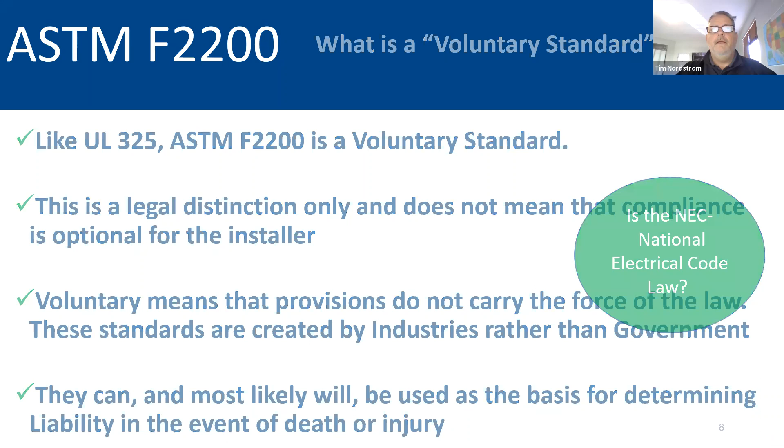Just like we say, is the National Electrical Code law? No, but it's what electricians go by. That's the standard. If the gate operator, which I hope the ones you're putting in are UL325 listed, then the entire installation needs to be in compliance with UL and ASTM. We got to do it to the best of our ability. Hopefully we're all using UL325 listed, tested machines.

There are some local codes that may require compliance with UL and ASTM. Is this going to be mostly verbiage? Yeah. Have I really heard of many, even few sites, where some inspector came out and said, hey, your photo beam's not at the right height, or the screening on your slide gate doesn't meet the 2 1/4 inches? No, because it doesn't matter, they're requiring compliance with it.

One thing I do see on a regular basis, just two days ago I was helping a customer out with a big spec, and it was very clearly written in bold letters: job site will comply with UL325 and ASTM F2200. So I see that more and more. Again, does it mean somebody's actually going to come out with a clipboard and hard hat and critique it? Probably not. Maybe that day will come someday. It's not really here today, but that does not mean it's voluntary. You are going to be held to it.

Question we get a lot: can I work on an automatic gate that doesn't meet the current standard? It's kind of a yes and no answer. It's yes if the gate and operator were installed prior to F2200, which came about in July 2002. We're getting further and further away from that, almost in July of 2021. But there are sites out there, no doubt, that are this old, and the answer is yes, you can still work on it.

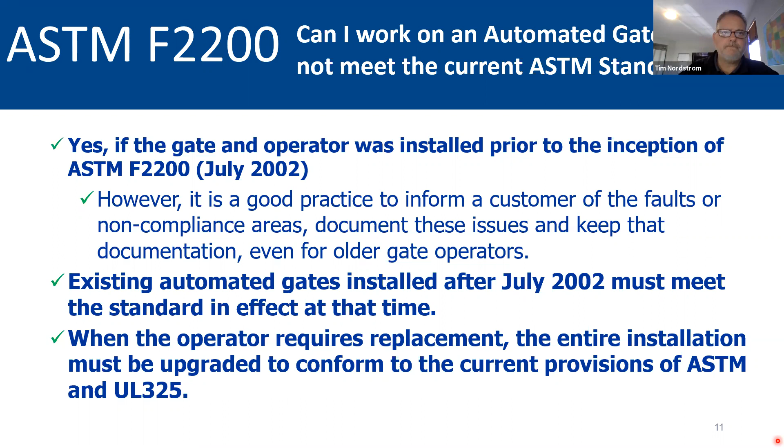Where can you find information about ASTM? I get that all the time—where can I find it? And the easy answer is it's free. It's right in every automatic gate operator manual. The first one to six pages of every manual is everything we're telling you here. They put that in—there's a reason it's at the beginning, because you open up the book, that's what you have to see. The manual is a fantastic source, and it's also going to be the document that the attorneys will bring to the table when there's an injury or death, asking why you did not install it per the manual.

DASMA.com—fantastic resource for you. Please use it. They've got a ton of simple, easy-to-read technical data sheets that target specific parts of F2200 that you can download, include in your proposal, send to end users. It helps explain why your job site is more detailed, possibly more expensive than the next guy. But this is a great educational website, DASMA.com, and of course ASTM.org. If you want to download the F2200 document, I think you can. I don't remember if F2200 has a cost—if it does, I think it's nominal. Yeah, you can download it—I think I just bought one, around $50. It's copyrighted, so when you buy it, you'll download it and it'll have your name on it.

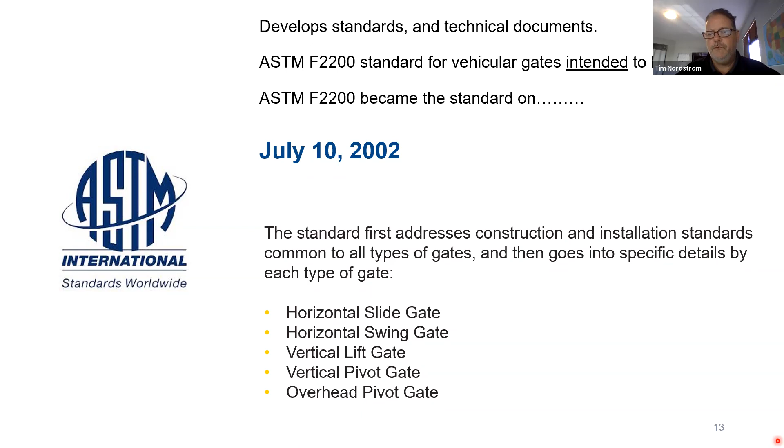The first part of F2200 covers the general requirements for any automatic gate. It doesn't matter slide, swing, vertical lift, vertical pivot - it does not matter what type of gate. Everything we're going to cover right now applies to any and all automatic gates.

Number one, gates cannot fall over. If they do somehow fall over, they must be prevented from falling over more than 45 degrees. And yes, that includes swing gates - we'll talk a little bit more about this when we get to the swing gate section. But a gate, when it's detached from its supporting hardware - swing gate hardware is hinges, slide gate maybe cantilever rollers, V-track rollers, what have you - we can't have gates falling over. Believe it or not, people get injured, sometimes killed, by gates that fall over on top of them. Very bad. Again, all gates have to be prevented, and we'll get into the specifics on those.

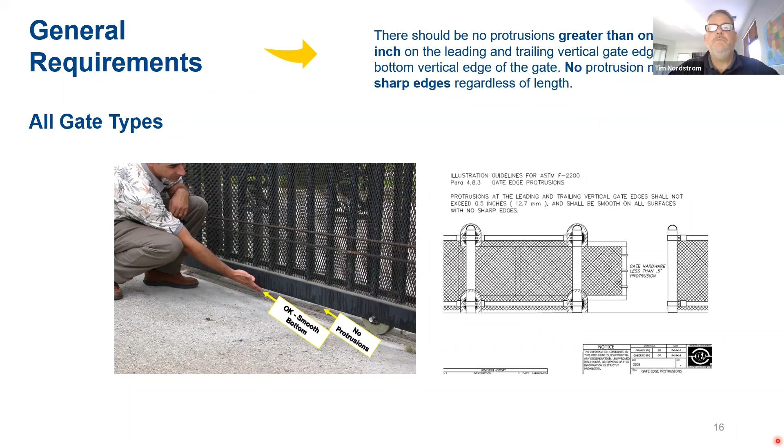Another thing for all gates: we cannot have any protrusions on the leading and trailing edge or the bottom of the gate greater than 1/2 of an inch, and they must be smoothed over. So no protrusions on the leading edge of the gate or the bottom.

We've got some pictures coming up next of some examples of those protrusions, some of the common things that are done in the industry that actually violate ASTM.

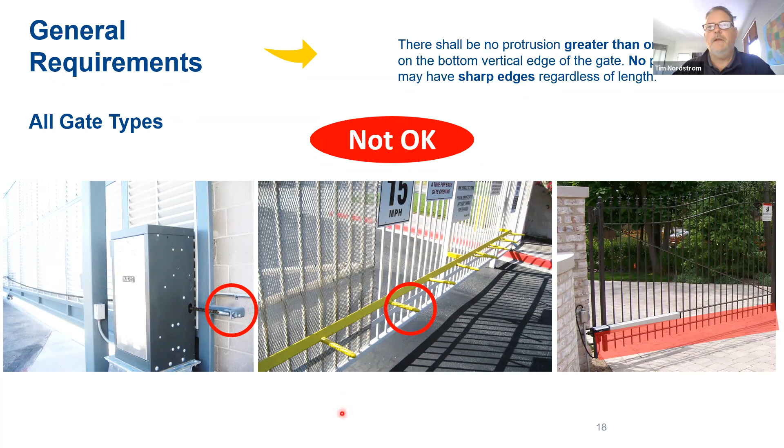Now, that doesn't mean that we can't have protrusions. ASTM F2200 is very clear that we can still have protrusions out the top of the gate: decorative spear points, finials, whatever it is you want to put. Those are allowed. Those have been shown to not cause nearly the injuries that the other protrusions off the leading, trailing, and bottom edges of the gates have shown.

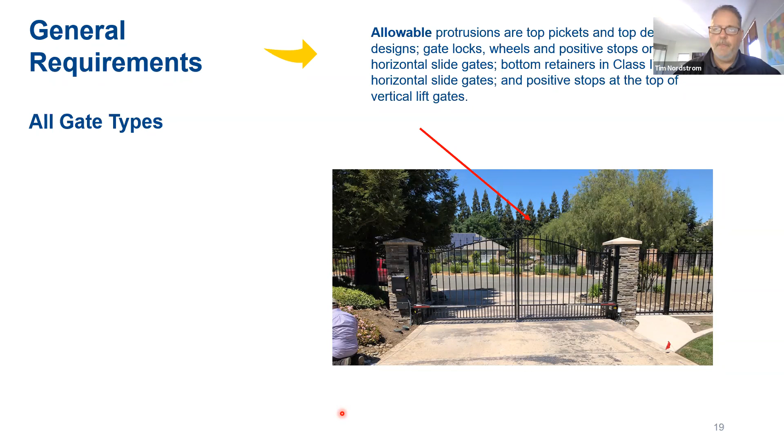So you still have complete control over what you put out the top of your gate. As soon as I say that, if we're going to talk about barbed wire and barbed tape, there are some restrictions. Obviously you're not going to see barbed wire and barbed tape too much on residential jobs, but certainly on commercial jobs. Barbed wire can't be installed less than 6 feet from grade.

So I'll go out there on an extreme. You're having an automatic slide gate, swing gate, doesn't matter. Again, this is all gates put in, and it's only going to be 4 feet tall, 4 feet off of grade. You cannot put barbed wire on that gate unless you raise it so that it is 6 feet from grade. Same with barbed tape, razor ribbon, what have you, but it has to be 6 feet from grade.

Got a good and a bad illustration, or a photo. 8 feet, right Tim? 8 feet, right? Did I say 6 on barbed wire and 8 on barbed tape?

If this gate over here on the left side - God hope you don't automate that gate, but if you do - this barbed tape up here, if it's less than 8 feet off grade, it's got to come off, or you've got to raise the gate or what have you. This right picture here is perfect: cantilever slide gate, barbed wire greater than 6 feet from grade, perfectly allowed.

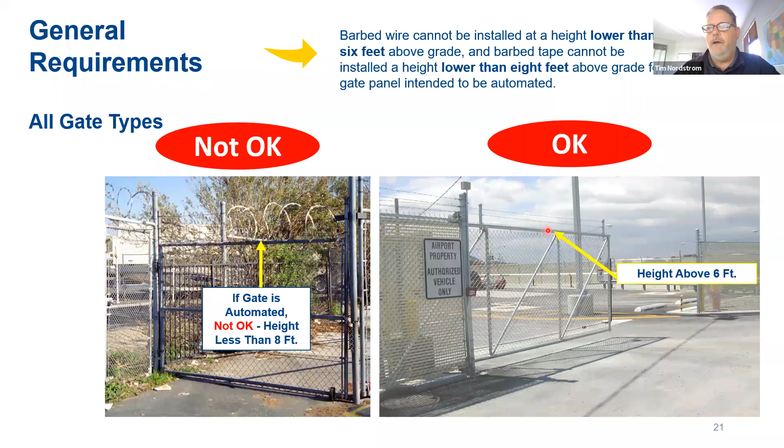Read into that what you want to read into it. But if there wasn't a gate operator there, would this gate move on its own? If it does, that needs to be addressed before it can be in compliance with F2200.

Any questions on that one? I know that we have a tremendous customer base that lives in areas where gates are installed where they may move on their own.

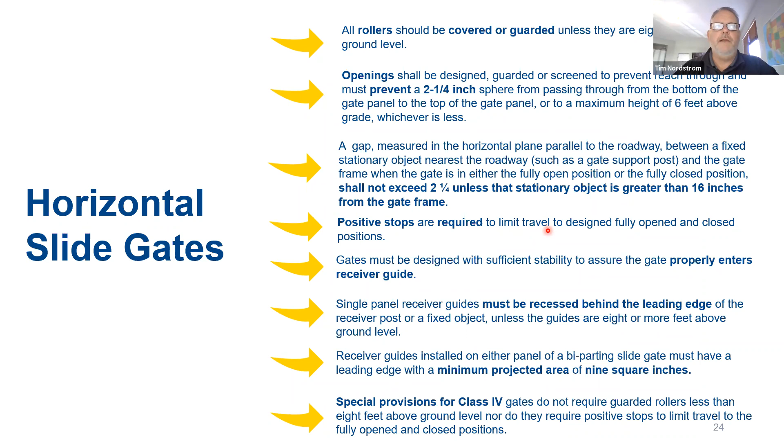Okay, we're going to move on. Now we're going to shift. Everything we're talking about right now is specifically addressing slide gates. We'll go over every one of these points here.

Rollers must be guarded. Any exposed rollers less than 8 feet from grade have to be covered. So if you're using cantilever rollers and they're less than 8 feet, all 4 of those wheels have to be guarded. There's plenty of commercially made, good quality roller covers out there.

I live in an area where we don't do a lot of cantilever gates, so I don't have tremendous experience with them. I know there's some negativity on roller covers out there, blah blah blah blah blah. I've also heard plenty of dealers say no, they work pretty well. Like Zach said, F2200 doesn't care - if you've got an exposed roller less than 8 feet, it has to be covered.

When we get to UL, we're going to talk about the classes, class 1, 2, 3, and 4. Class 4 being the least amount of operator installations out there, but there are some exceptions to all the rules when we talk about class 4. But for today's class, for everyday installations, rollers are going to be covered.

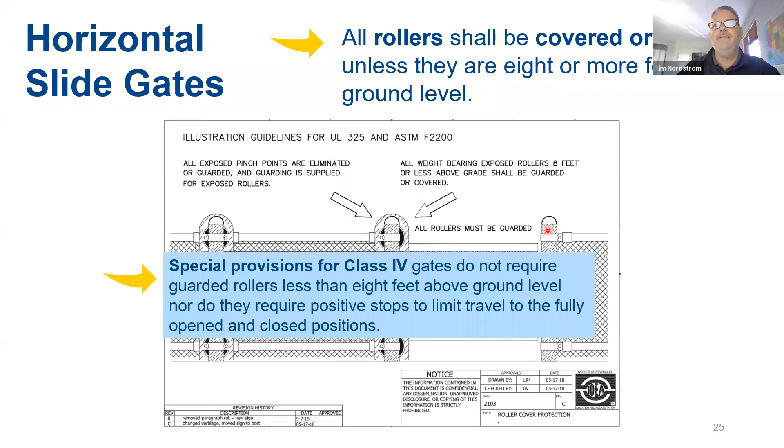That also applies to any V-track gates - V-track wheels, guide rollers, all have to be covered. There's plenty of commercially available guide rollers that come already covered, ready to go. There's many different manufacturers of them - check them out. You can always build your own if you want, but in this case I don't know why you'd do that. They're readily available.

Wheel boxes, however you want to do it, just the wheel has to be covered. And of course, here's cantilever with all 4 wheels. We don't see the 4th one, but they're guarded as they should be.

Picket spacing. All automatic slide gates must be designed so that a sphere greater than 2¼ inches cannot pass through the gate or the fence panel that it slides along, from grade up to 6 feet.

When this first came out in 2000, man, did I hear a lot of hooting and hollering and blah blah blah. I see so much compliance with this now. People have said, yes, this is right. This has greatly reduced our injuries and deaths, just this, especially when we couple it with some of the other provisions of UL and ASTM.

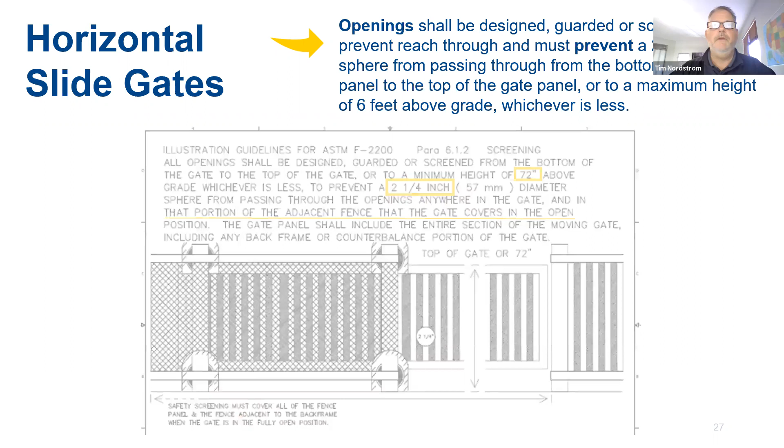But simple fact is, the gate has to be built and designed so that a 2¼ inch sphere can't pass through, from grade to 6 feet, the entire gate and the fence that it slides against.

Now, one thing that gets thrown out all the time that I don't like is, well, I have to put mesh on the gate. No, the word mesh, I'm not even sure is even mentioned in the F2200 document. You do not have to put mesh on any gate. Mesh is just one of the ways you can have your gate comply with F2200. It's certainly an acceptable way, but it's not the only way.

You can weld your pickets closer together, what have you. But you do not have to put mesh. I've heard people say that, and I just want to make sure everyone understands that. You just have to comply with the 2¼ inch.

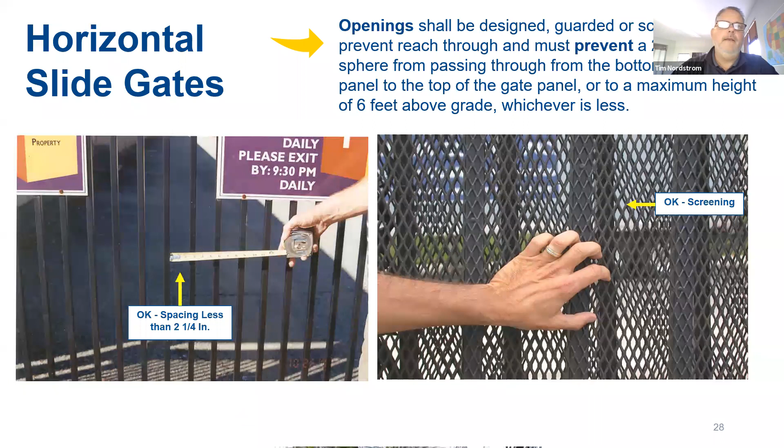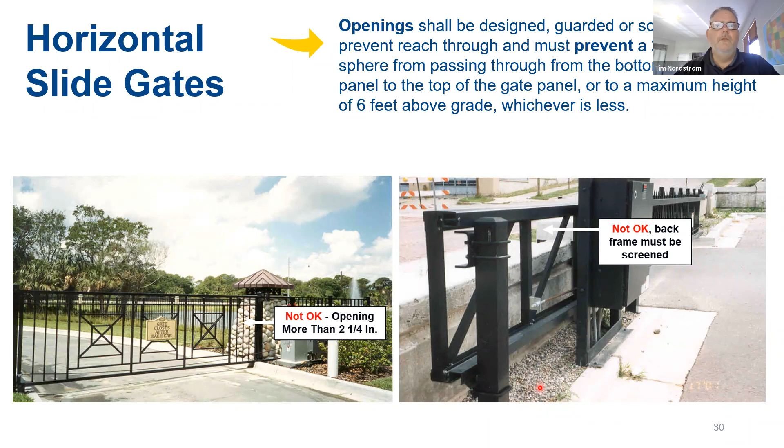I see a lot of similarities with numbers in UL and ASTM, which I really appreciate. They try not to throw too many different numbers at us. One that they say, and we're really going to focus on this in the UL section coming up, is this gap between the gate and some fixed stationary objects, which is traditionally a gate post. If that gap between the gate and that fixed object is greater than 2¼ inches, it must be reduced to 2¼ inches or less.

Maybe that's welding in an ornamental iron picket or two, whatever it may be, but this gap can't be greater than 2¼ inches. Likewise, if I'm using this pole over here for fall-over protection, if it's within 16 inches of the gate, it's an entrapment and I'd have to protect it. The better way is to move it greater than 16 inches away, and per F2200, it's no longer an entrapment. So between 2¼ and 16 inches, I've got to fill. If I'm less than or greater than, we're okay. I won't beat this up too bad.

This is the front view, looking at the gate, the slide gate coming at us. We call this the draw-in post. This is the number one spot where deaths and serious injuries occur, and we'll beat this up in about an hour or less. Just so you know, we'll really beat that up. That draw-in post is where we seriously harm people.

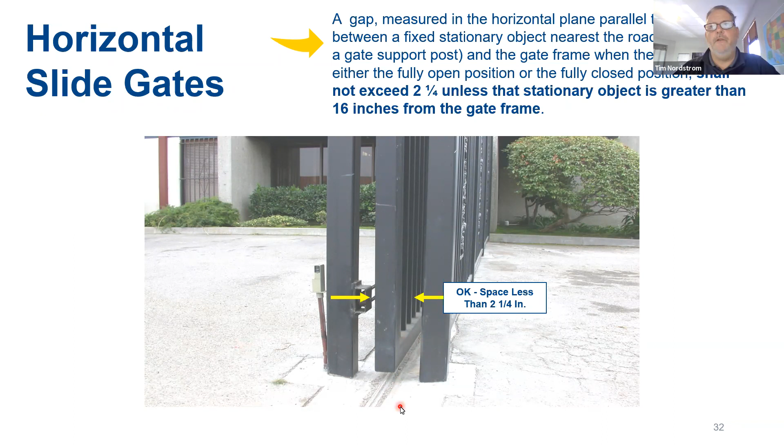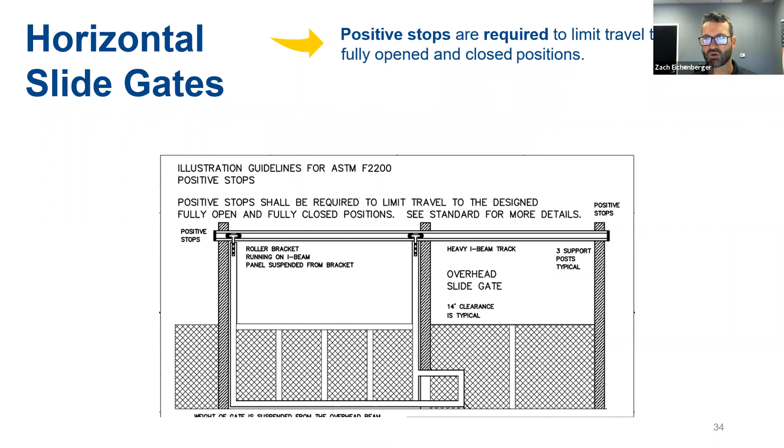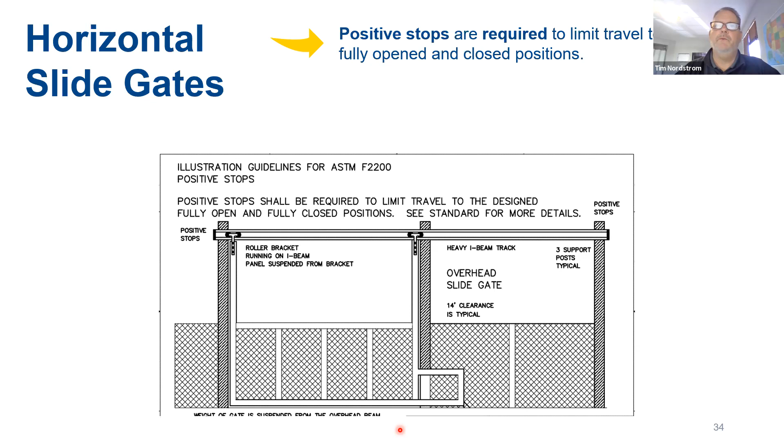Positive stops. I can't stress this enough, nor can F2200. Positive stops must be installed, however you do it, so that the gate cannot over-travel. Can't have a gate falling over due to over travel because we didn't put stops. Again, they don't have any recommendation on how to design the stops. I've seen them done countless ways, and every way that prevents the gate from over-traveling is the right way, as long as we don't create a separate problem, which we're going to get to, which is having something protruding into the lane. Positive stops, both open and close, are required on slide gates.

Receiver guides. This is something that's used quite extensively on automatic slide gates. You might call it a retainer, receiver guide, yoke, whatever. I'm going to call it a receiver guide because that's what F2200 does. A receiver guide cannot project into the gate opening unless it's greater than 8 feet off the ground. If it's less than 8 feet off the ground, it must be recessed behind the post or fixed object, and the gate can then slide into that. We cannot have that out in the opening. Many, many people have been harmed because of that, and I've got some pictures here. So it's really clear: it's got to be behind if it's less than 8 feet.

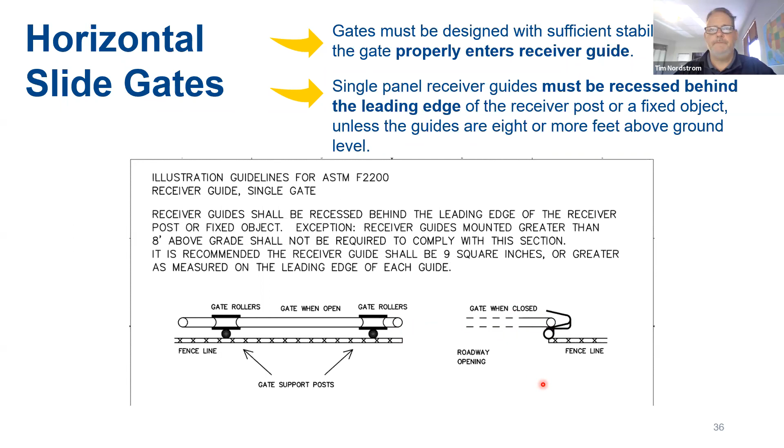Three pictures here. This one over here, I've seen gates like this. This is a disaster waiting to happen. We're ready to impale somebody on either side of this gate. I've shown this in the past and people say, yeah, well, it's their own fault if they fall into that. No, that's not the case anymore. People can be distracted, they have no clue about this automatic gate, they're looking at their phone, the dog runs at them, whatever. Before they know it, that gate forces them right into that. We have a serious injury.

Over here is a very common installation. It slides into a gate receiver here, but it's projected into the driveway opening. We've got to recess it behind that post if it's less than 8 feet off of grade—all done in the design phase. I have a contemporary of mine who works out of the Memphis, Tennessee area, and he says 90% of gate entrapments can be eliminated in the design phase. And I agree with him. In the design phase.

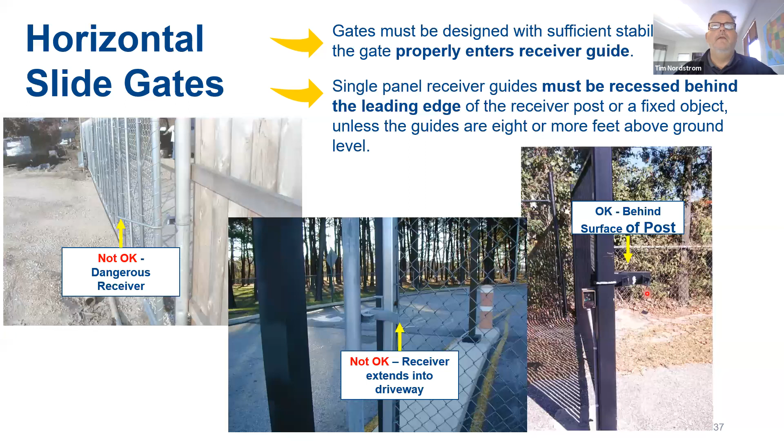If you have a dual, biparting, or primary/secondary slide gate where two gates come together and meet in the middle, and one of the gate panels wants to have a gate receiver on it, that's fine. But if it's installed less than 8 feet up, it has to be designed so the leading edges measure out to 9 square inches. Basically what they want is a hunk of metal or material that's easily identified, with less chance of impaling somebody. So with a biparting gate with a receiver guide on one leaf, that's 9 square inches on the leading edge, or mount it 8 feet or taller off grade.

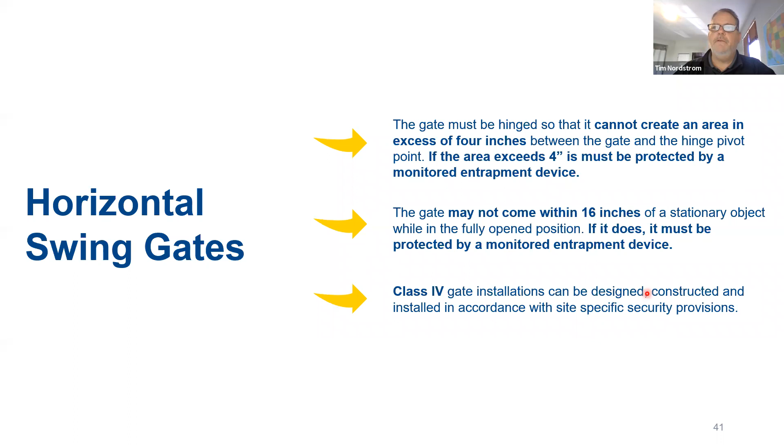Okay, let's move on to swing gates. Swing gates by their nature are safer than slide gates. It doesn't mean people don't get hurt on them - trust me, they do. But by their nature they are safer, and they don't have quite the restrictions that a slide gate does. They have a couple of things they're very adamant about, and that's what we're going to cover here.

This is one of those design phase things where you could eliminate an entrapment. What F2200 says is that if you have 4 inches or greater from the center of your hinge to the edge of your post, column, or whatever, you have created an entrapment. They're not saying you can't do it, but if it's greater than 4 inches from here to here, a person can become entrapped right here, and you would have to protect that. How do I protect it? Maybe it's a gate edge, maybe it's a photo beam - we'll learn about those in UL. The fact of the matter is there's an entrapment that needs to be addressed.

In the design phase, we can build whatever column we want - build this beautiful 6-foot rock column, imported stone from Italy, I don't care. But if we can move that gate post or the gate attachment to the rear of the column to less than 4 inches, we have no entrapment. We've solved a problem that didn't need to be there. So we can hang our gates in the center - F2200 does not say you can't hang your gates in the center, and they're not saying you have to move it to the end. What they're saying is if you have 4 inches or more, you have an entrapment that has to be protected.

The second part of swing gates is if, in the open position, that swing gate comes within 16 inches of a fixed object. A fixed object can be a wall, a fence line, whatever. If that gate in the open position comes within 16 inches of that fixed object, that is considered an entrapment area.

We have to protect it. Most commonly, the way we protect it is we shoot a photo beam the entire length of the gate. That way, if somebody is standing there and the gate's given an open command, it won't do anything. Or as the gate is opening and somebody gets back there and breaks that beam, the gate will respond and hopefully not hit them, reversing back the other way.

So 4 inches, 16 inches - those are the magic numbers on swing gates. I feel like this verbiage just never really got updated as life went on. For some reason they call out this 'open position,' but really it's from any position.

If that gate's closing or opening within 16 inches, you have an entrapment zone. We don't see the whole gate, but let's say this is the gate here and there's a post right here that it closes up against - that's an entrapment. Absolutely.

I think probably what the authors of this did was say, well, that one's evident, right? Everyone knows that. This one over here, they had to pick a number, but 100% right.

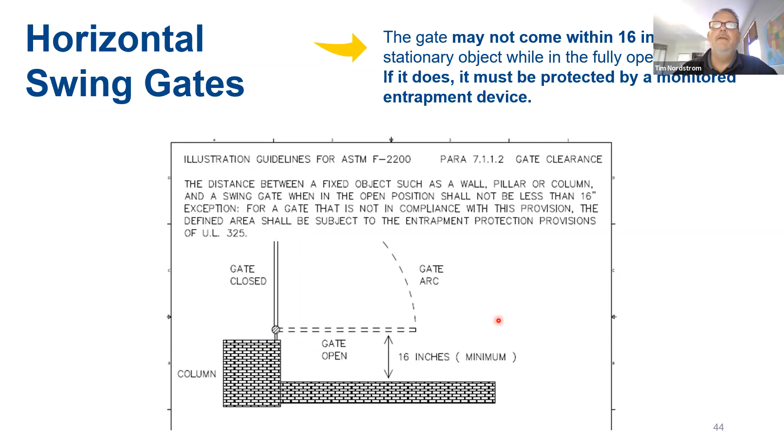Here's just an illustration. The reason we chose these photos - we don't want to say you cannot open a gate or close a gate up against an object less than 16 inches. Of course you can, that's going to happen. You just have to protect it.

In this case, they've mounted a photo beam. If somebody was to break that beam, that gate would respond, hopefully before somebody got hurt. So we can do these. In this job site here, I doubt they had any room - there's no design phase here that they could have done. This one had to happen this way.

Other job sites, we might be able to design so that we exceed 16 inches and we don't have that entrapment.

This is another one of my favorites that I'm sure everybody on this panel does religiously. Swing gates fall under fall-over protection. I'm joking somewhat, it's not meant to joke, but some things you have to look at and say, okay, how many people are meeting this one? And I would say very, very few.

F2200 says if the gate's detached from its supporting hardware - in most cases the hinge - the gate can't fall over. Again, F2200 does not say this is how you prevent that, these are just illustrations of ways to do it. I don't see this happen too often, probably violated more times than not, but just pointing out, F2200 says yep, got to address that.

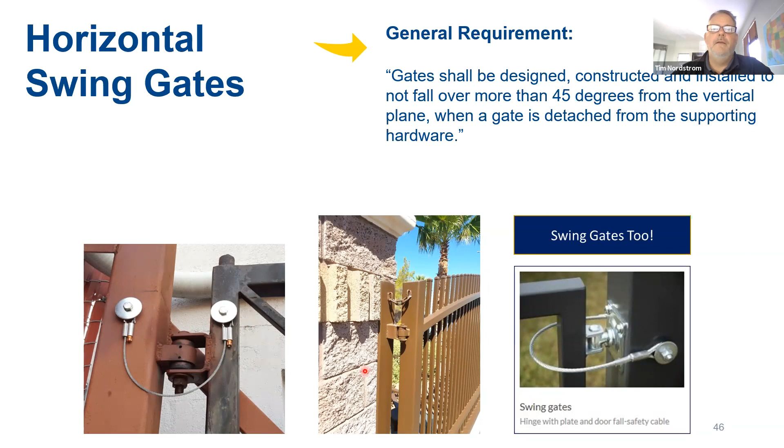One of the nice things about F2200 is there is no picket spacing required, no reach-through requirements on a swing gate. Due to the nature of how they work - swinging either towards you or away from you - there's no shearing action like a slide gate, where if you're reaching through and the gate goes open, it's going to pull you in. If you were reaching through this gate here and the gate started moving, you can move with it, so you are free.

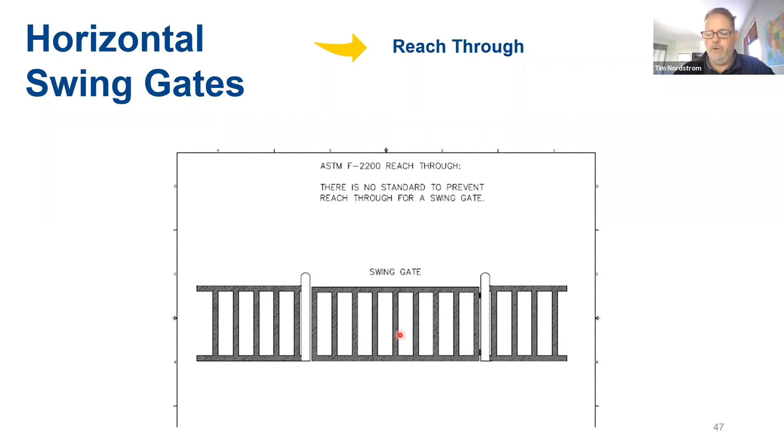In class 4, we'll talk more about that - you can do a lot more flexibility. But you are free on a swing gate to orientate your pickets, or lack of pickets, in any way you want. Again, you still can't have protrusions, things like that. But if I want pickets 24 inches on center, 36 on center, whatever design I want, that's perfectly allowed on a swing gate - not allowed on a slide gate, but certainly allowed on a swing gate. I can have varying degrees, like I have here, with pickets that are closer, which open up here.

This would not be allowed on a slide gate, certainly allowed on the swing.

Tim, if I could point something out, the group's probably picking up on this, but there's really 3 measurements you've talked about so far: 2 1/4, 4 inches, and 16 inches. There's another one in UL, and that's 6 feet. But they did a pretty good job staying consistent here. That 2 1/4 measurement comes into play when there's shearing action. If there's shearing action, we want to bring those reach-through areas down even further, because that represents an opportunity for injury or death in a bigger way. And 4 inches is more, maybe this way, not really shearing, but still a possible entrapment area. So just remember those 3 measurements: 2 1/4, 4 inches, and 16 inches.

This is the vertical pivot gate. For those who do them, you know what they are. For those who've never seen one, it's basically a gate that pivots like your elbow. Starts with the gate in the closed position, has a central pivot point, and pivots straight up to the sky.

The one difference between a vertical pivot and a slide: the similarity is I have to make sure I don't have an opening greater than 2 1/4 inches from grade to 6 feet up, anywhere this gate passes by a fixed object. Most installations, what you'll have is the gate, and some type of fencing material that is in parallel with the gate operator.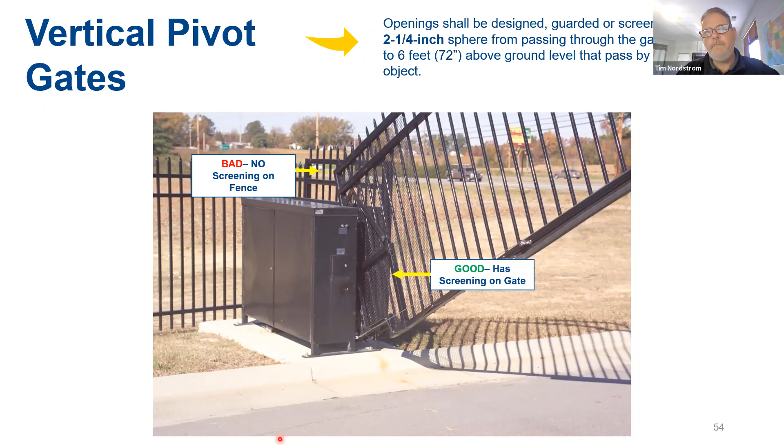As compared to this job site here, where there is zero - neither the gate nor the fence panel has any type of less than 2 1/4 inch spacing. That's an accident waiting to happen. I don't know this job site, but I can only imagine.

Again, I always think of kids. I get a group of high school kids walking by here, or elementary school kids, and somebody sticks their arm through - that can easily cause death. Someone can get seriously hurt there. And it doesn't take much to greatly minimize the chance of injury.

Just screen it, however you want to screen it, 2 1/4 inches. This portion of the gate all the way out here that doesn't pass by the fence panel doesn't have to be screened. You can have your pickets, whatever you want there, but 2 1/4 here.

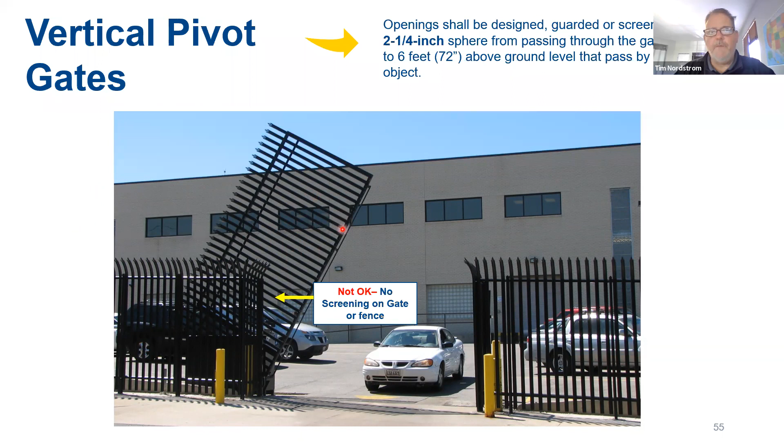In addition, just like all other gates, no protrusions - can't have any protrusions off the bottom of the gate. You can only imagine if the pickets or something like that came off the bottom of the gate and hit somebody, what kind of potential damage that could do. All the framing members, everything's got to be smooth, no protrusions out the leading edge, anything that comes over. If we're going to enter into a receiver guide, it's got to be designed so it goes into that receiver guide properly - it's stable.

Pretty similar to a slide gate, not exactly, but very similar. Certainly the same type of entrapments exist in a vertical pivot that do in a slide gate.

As we mentioned, there are some other gate types out there. There's vertical lift, which, if you ever get to work with one of those, that's awesome. Those are kind of once or twice in a lifetime type gates. We certainly have what we call overhead pivots, jam track, California gates. Those are the one-piece steel gates that lift up, generally for underground parking, because I come from the San Francisco Bay Area where parking is at a premium. They do a tremendous amount of underground parking, and there's no room to put in a slide or swing gate, so they do an overhead pivot gate.

Those have their own unique ASTM requirements. If you ever have a job site and you're unclear, reach out to Zach or I. We'll be happy to talk about it.

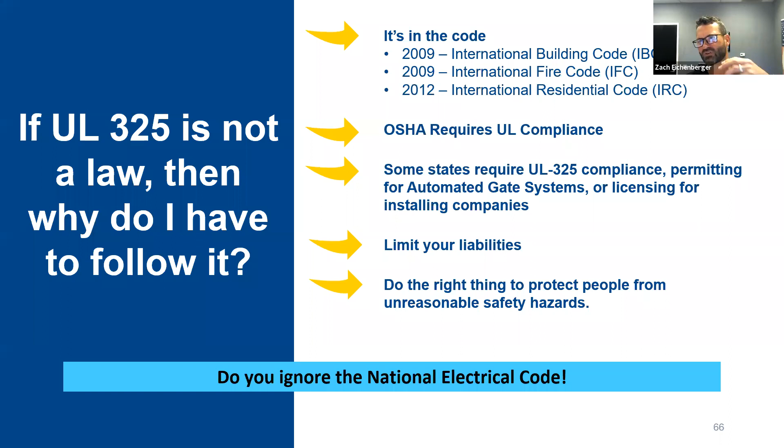We mentioned the National Electrical Code just as a frame of reference, just to get your mind in the right place. Okay, how do you comply as an installer? Again, from a UL perspective, I'd say everything you need to know should be in that manual. They're required by UL to put safety information in the manual. UL even inspects for that - they read those manuals and make sure that they're written to the UL requirement. Again, you can buy the UL document, but for the most part, everything you need to know about UL should be in there. It is mandatory, and failure to comply puts us in a bad position.

That's probably one of the first questions they're going to ask. Okay, all right, what about old installations? We talked about this in ASTM. Can I work on an operator that doesn't meet the UL standards, or doesn't have all the entrapment devices? It follows the vintage of the operator - that's really where you need to get your head right. If it was prior to 2000, well, the standard didn't really say you had to have entrapment protection.

Can you work on it? Yeah, you can work on it, repair it, do whatever you want to it. Technically, you're not in violation. Is it a good idea? Probably not, right? We're now 21 years into this. If it's prior to 2000, it's time to replace that operator, it's time to bring that gate up to ASTM standards.

So what happens if a customer asks you to bypass all these entrapment and safety devices? Look, it's not an option, for the gate operator, installer, or designer. What if they're willing to sign a waiver? They are of no practical use.

And for these reasons: the customer really doesn't understand what's at stake, they don't understand what the liabilities are. And you are the expert, you know what the liabilities are. Courts are going to say, hey, you knew better. In fact, it might be an admission of guilt. You're basically drafting a document that says, I know I'm doing the wrong thing here, but sign off on it. And you can't sign off somebody else's safety. Most likely the person that gets hurt on that gate didn't sign that waiver, so you can't sign away their rights. So again, waivers have no practical use.

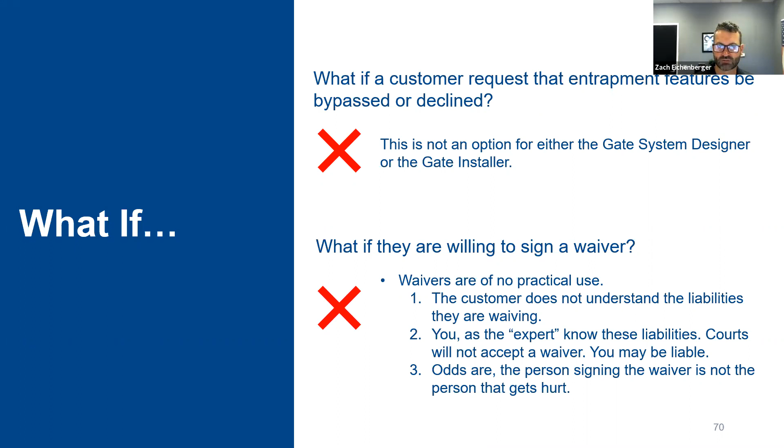And then when you move to class 3, we're no longer servicing the general public. So that'd be more of an industrial site or commercial site where the folks using the gate are trained on how to use it. So that's the big delineator, servicing the general public or not.

At that point, some of the standards, very few, I'll say very few, really one in particular I have in mind, ease up just a little bit. The main one is the speed of a slide gate. On a class 2, we can only go 1 foot per second. On a class 3, we can go faster.

And then there's your class 4, and that's restricted access, where it's going to be guarded and monitored, a high security type application. Important here is that the AHJ, or authority having jurisdiction, kind of signs off that, hey, I don't want these safety devices, I'm going to build my gate in a certain way. You can imagine at a jail, they probably don't want a bunch of photo beams and edges everywhere where it could be bypassed. So you're definitely going to run into those applications where you're a class 4, but just make sure it really is a class 4.

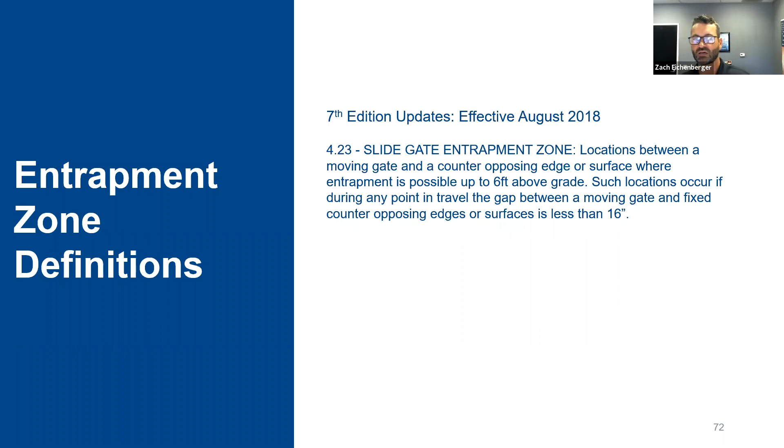I'm going to speak to these entrapment zone definitions because it's going to help you understand some of the other requirements that fall in line for UL325. So verbatim, a slide gate entrapment zone is locations between a moving gate and a counteropposing edge or surface where entrapment is possible up to 6 feet above grade. Such locations occur if during any point in travel, the gap between the moving gate and fixed counteropposing edges or surfaces is less than 16 inches. So a slide gate, sliding past anything within 16 inches, any fixed counterposing edge, is going to be an entrapment zone.

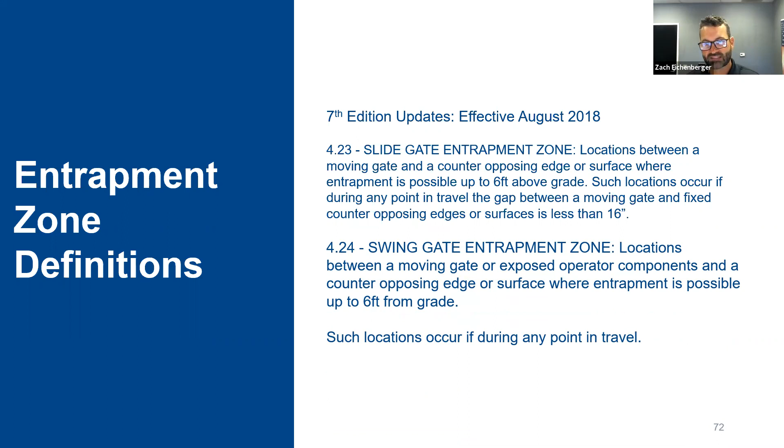Similar to a swing gate, it's more or less the same verbiage. If that swing gate swings within 16 inches of any fixed counterposing edges, that's an entrapment zone as well.

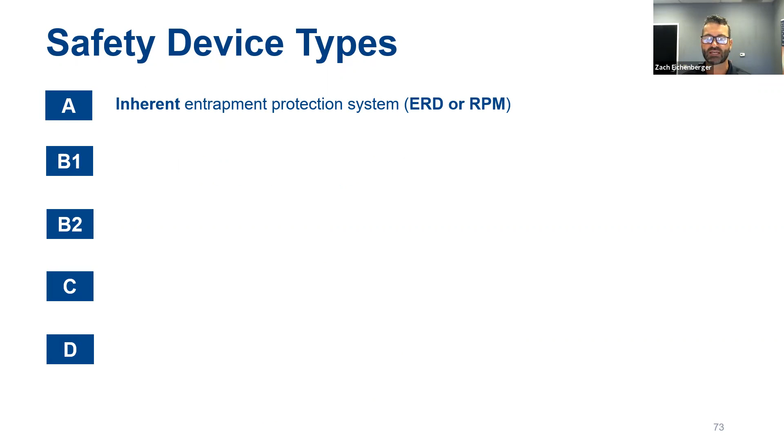A B1 is a non-contact sensor, like a photo beam. They're looking at other technologies to be added in there, but for the most part, a non-contact would be a photo beam. A B2 would be like a contact sensor, like an edge sensor, where you actually have to physically contact it. C is a clutch or pressure relief device, like you might find in hydraulics, or a clutch in an electromechanical. And yeah, important to note that those are swing or barrier only.

And then D is basically constant pressure. It's an actuating device. So if I'm holding that button down and the gate's moving, open or close, I'm holding another button down for open or close, I'm inside of that gate. That is technically an acceptable form of safety. Basically it's saying I'm looking at the gate, I'm holding the button, and if I let go of that button, the gate stops if someone were to come into risk of contact with the gate. So A, B1, B2, C, and D, just the different types of safeties that are addressed.

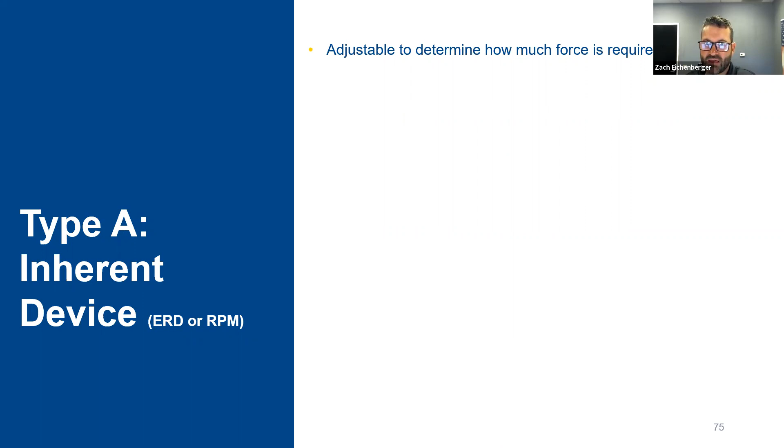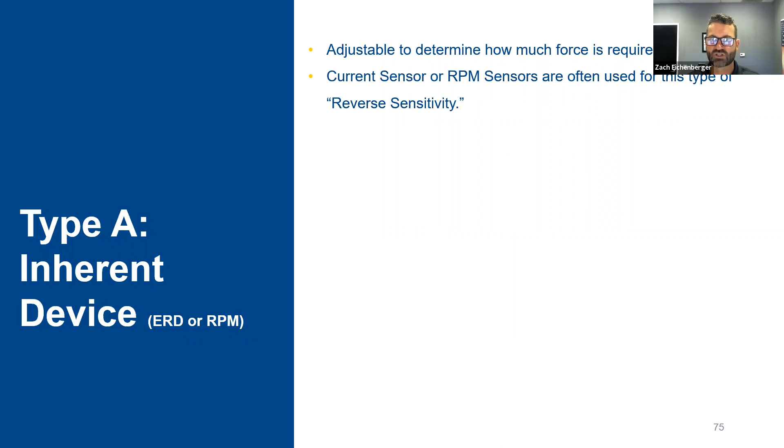Okay, so to break these down a little bit further, a type A inherent device, it just determines how much force the operator can put on that gate before it's going to reverse. Again, current sensors, RPM sensors, often referred to as reverse sensitivity. It's really that type of sensor - the operator manufacturer chooses what type of sensor they're going to utilize. And here's the key point: it's not preset. It must be adjusted by the installer, and it must be adjusted every time you visit the site. Why?

Well, hardware breaks in or it starts wearing out, and it might need more sensitivity, or you might replace some hardware. Now you got to back it down and have a little bit less sensitivity or more sensitivity. So you need to make sure that it's safe every time you go to that site, every time you leave that site. Inherent safety.

B1, okay, this is kind of a way to remember - that's your first decision, a photo beam or infrared beam. We've got to determine the location. We're given a little bit of guidance on that. We'll show you what that is. But ultimately, with all of these safety devices outside of an inherent, it's up to the installer, the designer, to decide where those are going to go. Because the manufacturer doesn't know everything about your site. They can't tell you exactly where to place those devices.

And in the manual, it will tell you what products have been tested with that operator. It will say, hey, I want this specific manufacturer, maybe even the specific model number. It should say that in the manual. Now, you go back prior to 2018, it might not, or prior to 2016, it might not. It was always kind of in the standard, but for some reason it got missed for a long time. It wasn't being inspected to. But today, every manufacturer must list the compatible safety devices in their manual.

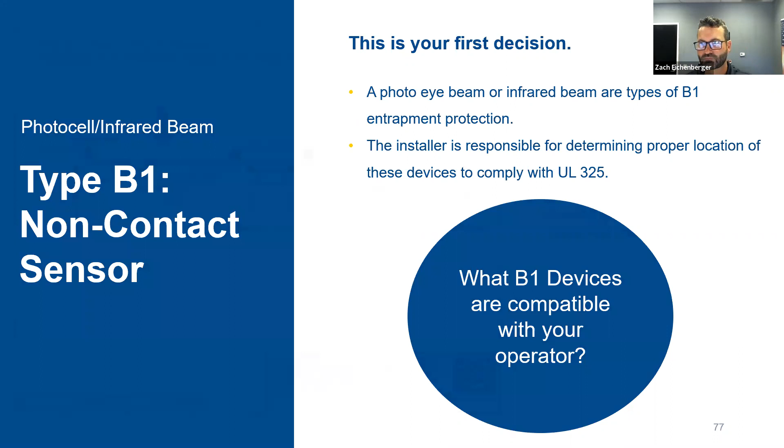Right, real quick. What if I'm using brand A gate operator manufacturer, and I really like XYZ photo beam. That's just my go-to photo beam. It works for me, and it works on this operator, but it's not listed as acceptable in the manual. Great question. So it works just fine, you wouldn't know any different. At the end of the day, you're just not following the letter of the law. Now if there was an accident, and something did fail with that photo beam, you'd be in a position of liability. The manufacturer's trying to protect their interests as well. They want to make sure the products used with their operators are quality, tested, and will withstand the test of time.

One small rabbit hole: if you're using a B1 photo beam for pedestrian protection, you have to follow the manual. However, if you have your entrapments for people covered and you decide you really like that XYZ photo beam that's not listed in the manual, but you're using it just to pick up or detect cars, that's perfectly acceptable. Yeah, no, that's a good point.

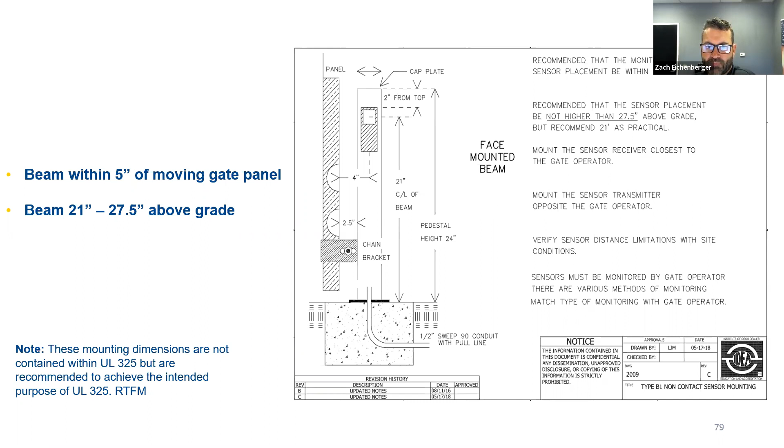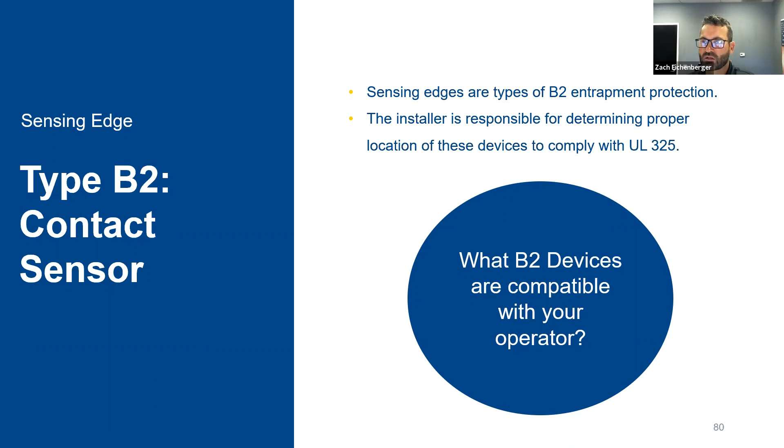Okay, B2, that's your contact sensor. That's where I'm going to come into contact with that sensor, like an edge, and it's going to stop and reverse. Again, you've got to determine what products are compatible with your operator, and you need to determine where to locate those edges.

Tim mentioned the draw-in post. Can't stress it enough: don't leave this session without knowing what a draw-in post is, and don't leave thinking you don't have to put an edge on it. You have to put an edge on that draw-in post every single time. Could you use a beam? I suppose, but it's not going to work very well. I can't think of many that are made to go vertical. UL doesn't tell you how to solve for this, it just says you need to protect that zone. It's really hard to build a slide gate without a draw-in post. I can't even think of a scenario where it wouldn't be there. It's possible, maybe an overhead, but 99.9% of the time you will have a draw-in post and it needs to be protected with an edge.

Tim showed filling the gap closest to the roadway between the gate and the fence line or posts. You have to fill the gap. Yes, ASTM says fill the gap, and UL says that's an entrapment zone, protect it.

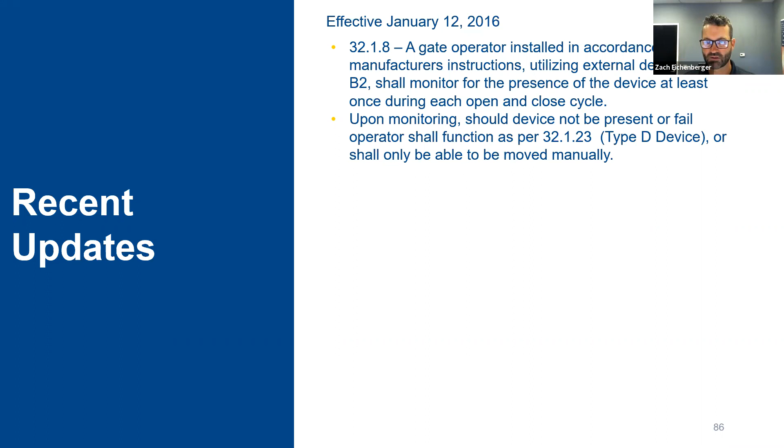All right, so those recent updates are, we mentioned, basically that for any entrapment zone and any safety device being used for entrapment, those devices are monitored. And that monitoring means that the operator knows the device is connected and also knows that the device is working properly. So kind of lock that into your mind. There's some minimum requirements we're going to talk about, but if it's being used for entrapment, it must be monitored. So even though you meet these minimum standards, let's say I put 2 photo beams, but I have a 3rd or 4th entrapment zone, that device doesn't need to be monitored - no, it does need to be monitored.

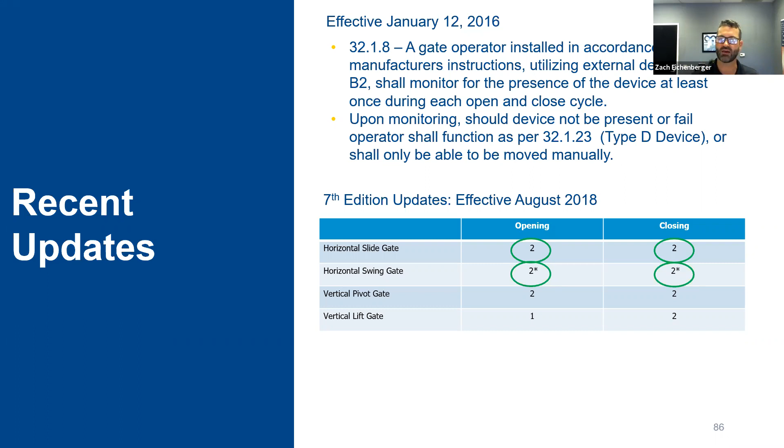For swing gates, they basically say the same thing with one caveat, and that caveat is we want 2 forms in each direction. But if, as Tim showed earlier and illustrated, it swings open into nothing or it closes into nothing, we'll accept 1, but we've got to see at least 1. And we don't care which direction it is.

So I think rather than complicate yourself or complicate what's in your head with that, most of your swing gates are going to work with normal operation, but you've got to protect all the entrapment zones. Most swing gates do have an entrapment zone in the open as well.

So additional forms in the open, additional forms in the closed for swing and slide. A vertical pivot, again, may not. We're looking for 2 forms of entrapment, both open and closed, actually, on a vertical pivot. A vertical lift may not have one in the open, it may only have one in the closing. That's all laid out in the manual pretty well.

There's one exception, and that's barrier arms. If that barrier arm doesn't close or open within 16 inches of any fixed objects, it's not required to have additional forms of entrapment.

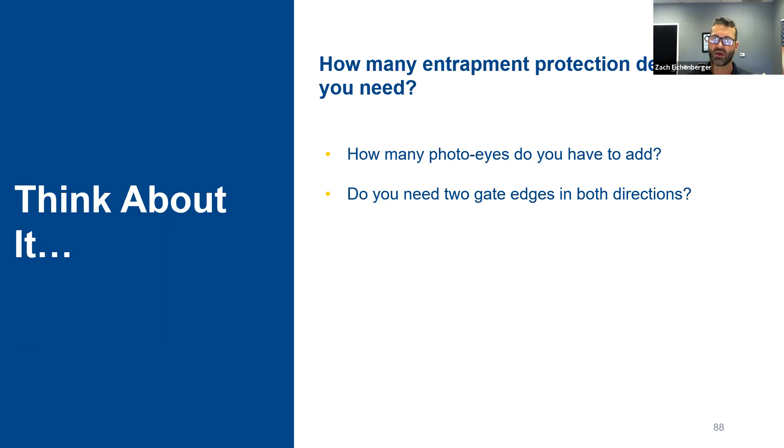All right, this is kind of an exercise, how many entrapment protection devices do you need? I think the industry is getting better about this, and we understand it a lot better. When some of these standards first rolled out, it was racking people's brains. But how many photo eyes do I need? How many gate edges do I need? At the end of the day, it's however many entrapment zones you have. You're going to need one for each entrapment zone, and you can choose whether you use a photo beam or an edge.

Yeah, and that inherent sensor is typically one of your 2 independent means per entrapment zone. If your operator didn't have an inherent one, you'd have to figure out how to put 2 independent means of entrapment on that draw-in post or that leading edge or that trailing edge.

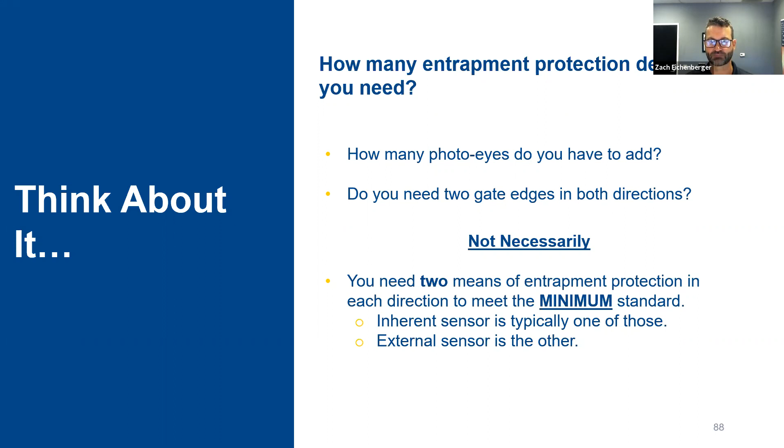All right, we're going to break this down, entrapment zones by the type of gate now. Mainly we're going to focus on slide and swing because that's the time we've got. I've read this definition to you again, this is just calling out where those entrapment zones might lie. On a slide gate, if that slides within 16 inches of a fixed counter opposing edge, it's an entrapment zone and it needs to have external entrapment protection, really two forms. Hopefully it's got an internal sensor as well.

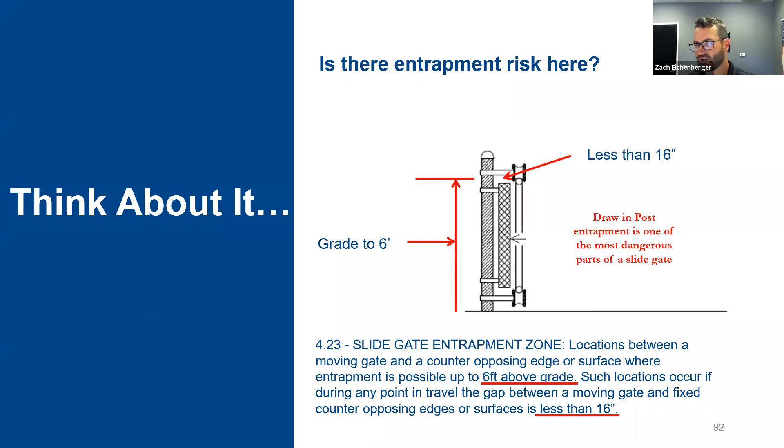Okay, back to Tim's ASTM slide. This is the gap that needs to be filled between the gate and that fence line or post nearest the roadway. It says fill it, okay? It doesn't say fill it and you're good. A slide gate entrapment zone says that anything up to 6 feet above grade within 16 inches of a counter opposing edge needs protection, okay. You're not going to leave this session not knowing what a draw-in post is, right, and that we need to protect it.

And I'm not trying to scare anybody, but we have had many, many slide gates kill people. It is incredible how strong those operators can be. We've had people pulled in 6-8 feet before that operator finally stopped, and typically it's a head injury or asphyxiation that gets them at that point.

Hey Zach, real quick, just to build on that, gate edges get a lot of negative press, bad press, and I think most of that comes from RF signals that get blocked or somehow just aren't working. As you said, on that draw-in post, 100 out of 100 times, I'm going to hardwire that in. It is going to work. What's different today from the past is we are now dealing with monitored devices.

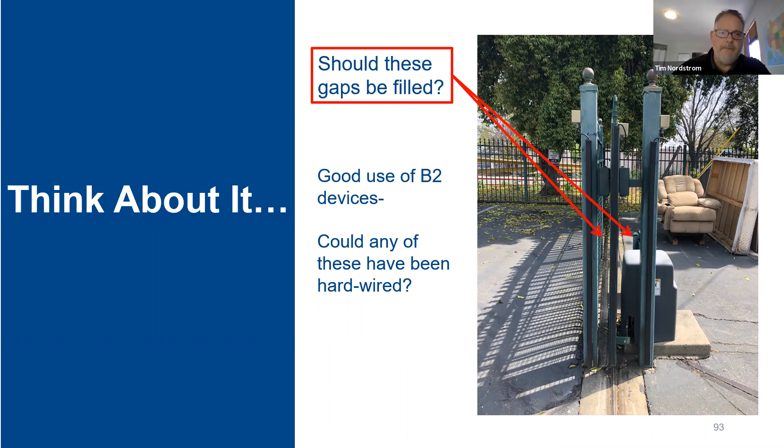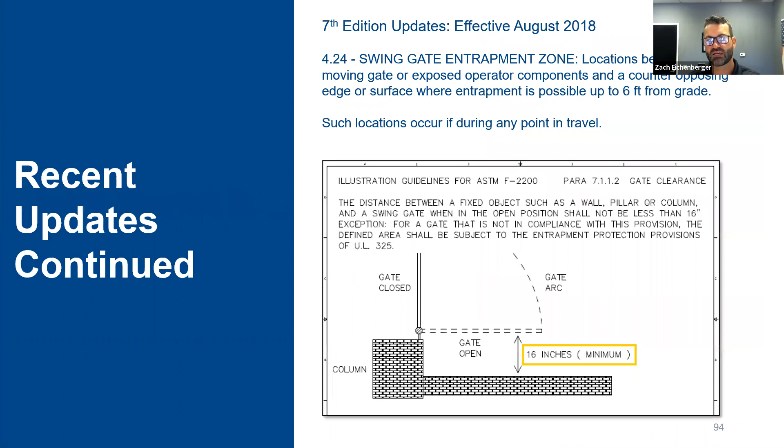Swing gates, again, if that swing gate swings within 16 inches of a fixed counterposing edge, I've got an entrapment zone. Here's an example.

And yes, we have killed people on swing gates up against curbs. I only know one example, but it has happened.

This is always a spirited conversation. Technically, it says straight away that if that swing gate rises above 4 inches at any point above grade, at any point in travel, now you've got an entrapment zone on the bottom of that gate. So we're consistent with those numbers, right? 2 1/4, 4, and 16 - 4 inches above grade at any point in path. Technically, that is an entrapment zone on the bottom of that gate.

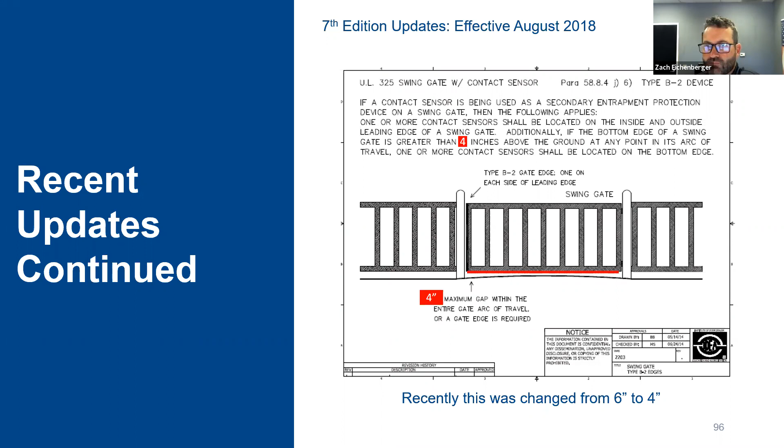Won't spend a ton of time here, but Tim mentioned that 4-inch rule on swing gates. If you're more than 4 inches from the edge of the column to the center point of the hinge, that's an entrapment zone and you need to protect it. Again, most likely it's going to be an edge or contact sensor in there. There are ways to design the system to not require it.

All right, so entrapment zone review, just pointing out some of the entrapment zones on a slide gate, right? If I slide within 16 inches of a fixed counter-opposing edge, I've got an entrapment zone.

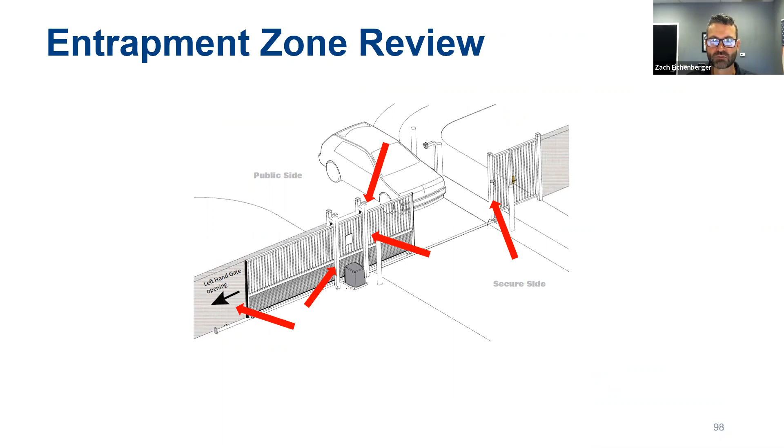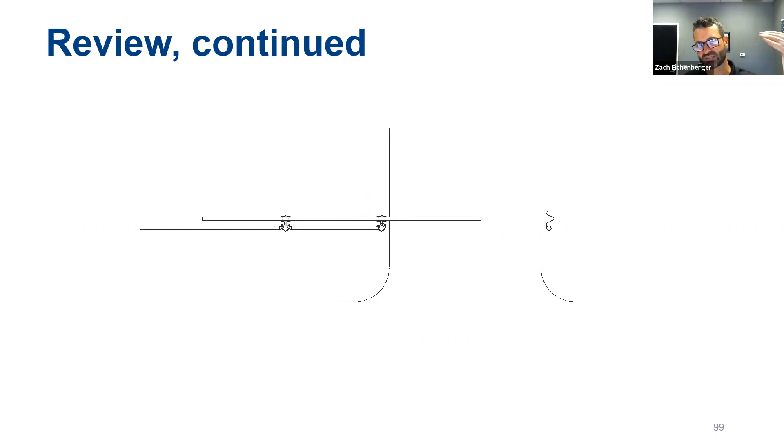Here's a little animation, just talking through this and thinking through this. This is kind of a thought process, especially as a designer, okay? So I've got a slide gate here, top view. The gate's going closed, I put a photo beam here.

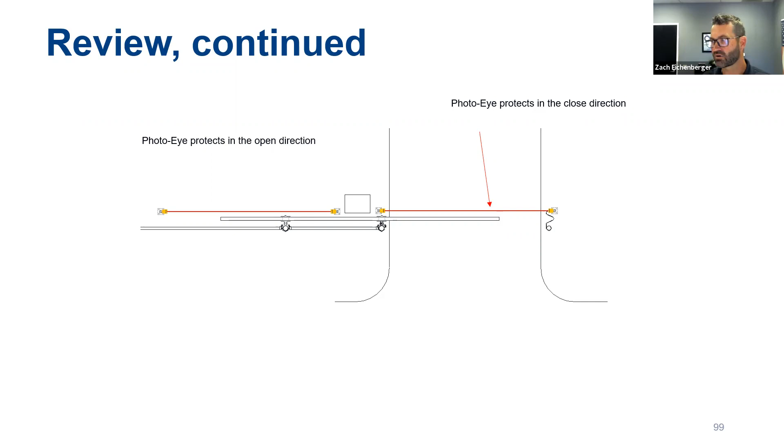I'm doing a good job of protecting that closed direction, right? Now I'm going open and I want to use photo beams. I put a photo beam in that stacking area and I'm doing a pretty good job of protecting that open direction. Are there any other entrapment zones here? I know you're all raising your hand right now, but yes, there are. The draw-in post and potentially both sides of that operator, right?

Why does this beam not cover the whole area and protect this draw-in post? Because it's only functioning in the closed direction. You got to think about the logic of that operator, right? If the gate's going closed and I hit the beam, it'll open back up. If the gate's going open and I hit that beam, do we want it to stop and reverse close? No, because a car might be shooting through there.

Well, they almost always are, right? They're shooting through there. They're going to break that beam when the gate's going open. It probably won't have an effect on that operator. Most logic is not written that way. So even if this beam was on the outside or the unsecured side of the property, we still need to protect this draw-in post with something, okay?

Now this beam back here might work in both directions, depends on the operator. So it might protect you both open and close. You just have to check with the manufacturer.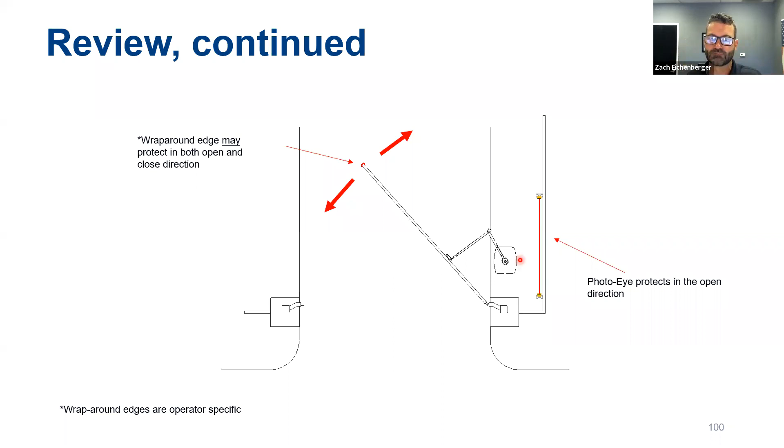That's what happened. That arm was swinging through an iron panel, but they'd cut a little hole out for that arm to swing through, and kids were crawling through it to get in and out of the property. One of these kids was climbing through it, and his buddy rode his bike over the free exit loop, and it crunched him. So make sure we protect those areas no matter what.

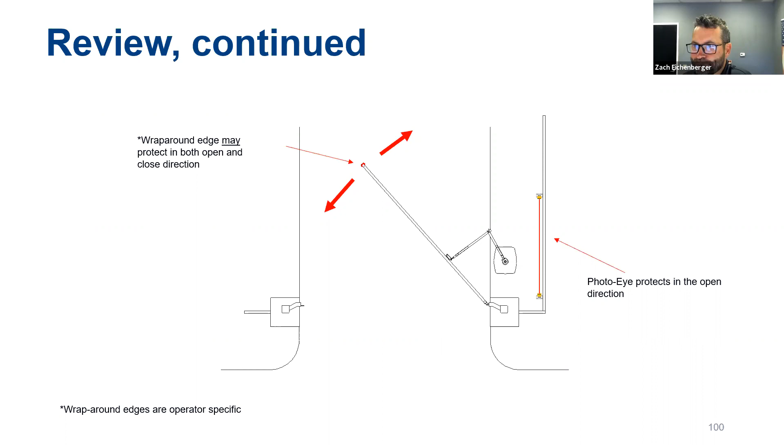This would be a typical excerpt from a manual, right? It's not so specific or prescriptive that it says this is where or how you're going to protect that entrapment zone. It shows you how to identify it and how you might solve that with photo beams. So it's a pretty good representation of where the entrapment zones are, potentially across the bottom, and where the gate swings up against the curb or the operator.

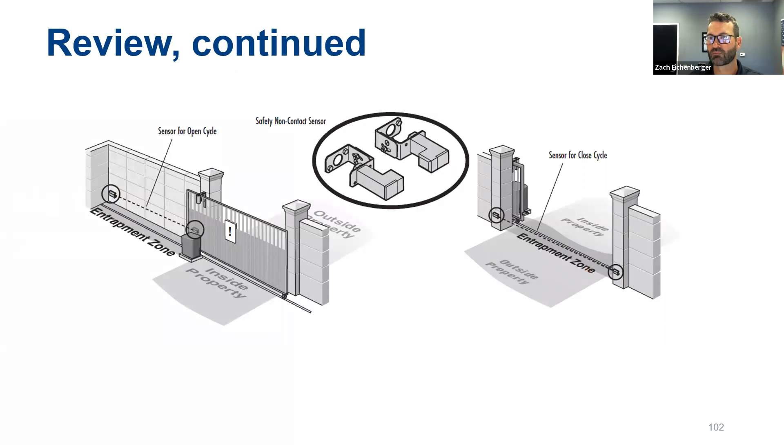Okay, on a slide gate, again, it's calling out entrapment zones along here in the stacking area. Okay, no control zone.

I would say we kind of alluded to the fact there were a few things you're not going to leave here without knowing. Tim said, hey, you're going to screen your slide gates to prevent reach through. That's a big one. The draw-in post, we've been harping on that for an hour and a half now. The draw-in post needs protection. The third is the no control zone.

The no control zone says that I'm not allowed to put access controls within 6 feet of any part of that moving gate. I don't care what type of gate it is - swing gate, slide gate, vertical pivot, whatever. No access controls within 6 feet of the moving panel. Again, it's trying to prevent somebody from reaching through and hitting a service button or reaching through and hitting a key switch to try to get in or out of that gate.

That's where a lot of our deaths have occurred. So the no control zone is simply put: 6 feet perimeter around that whole, any part of that moving gate, no access controls. Tim mentioned a death a couple years ago.

I believe it was Dickies Arena. Correct. Fully grown adult, worked for Dickies Arena, was a maintenance person there, probably used that gate plenty of times. They were in the middle of the night on the perimeter, and there's a key switch on the inside of the property. They needed to get in. Well, they reached through - the guy put the key in, hit it, it sucked him in and killed him. Gate wasn't screened, didn't have the draw-in post protected, and it had violated the no control zone requirement.

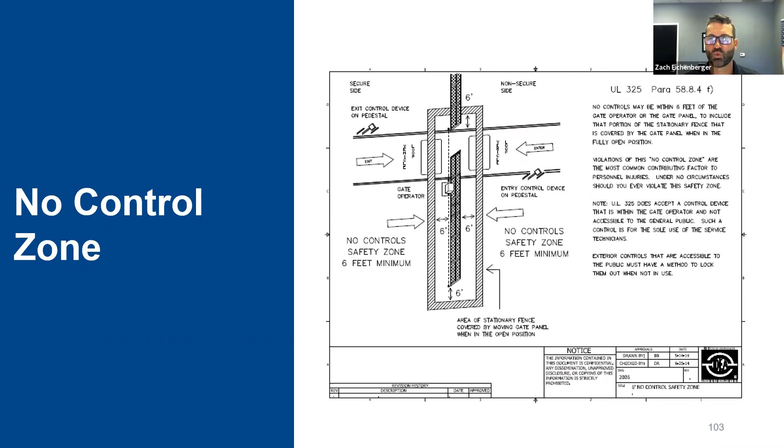There's one exception to this, and that's emergency access. We can put emergency access controls in the no control zone. So your Knox switches or Knox boxes or other types of emergency access devices, those can violate the no control zone. The thought is that those people are smart enough or educated enough on how gates work that they're not going to get themselves tangled up. Obviously, exactly - you should put them in a place that is readily accessible from the perimeter.

Going back to the no controls, I think I've made my point on that. That's, to me, the number one thing. Where I still see this violated is more on single family residences, because the homeowner talks the installer or the salesperson into putting in what I call the garbage can button or the dog walking button, so they can come and hit a button and leave.

And the homeowner says, it's just going to be me. Well, I can promise you in no time, that homeowner will tell somebody he trusts how to get into his gate because they need to get in. Oh, you just reach through, there's a button. Maybe it's the Amazon driver, maybe it's the mailman. But it gets out. And now what you have is - you thought it was just going to be this one guy taking his garbage out once a week. And now somebody's trapped in the gate. And it has been proven time and time again.

Everything has exceptions. To me, this no control zone is there with zero exception. You just can't do it. Don't give them a reason to reach the gate. You will not injure someone in that way.

Really, I think probably a better location, especially on the unsecured side, is probably on a column, because especially on a slide gate, as it opens, well now I can't see the sign anymore. So just pick and choose where you're going to put that sign.

It's got to be mounted on each side, and document that you mounted it. Put it up, permanently mount it, take pictures of it, because what happens on these residential, really nice residential gates, the resident doesn't want to see it, so they take them down. So the next time you go service that gate, I recommend you put them back up, take a picture of it, document it, and put that in your file.

Have the salespeople of your company tell the homeowner, general contractor, whoever they're dealing with, before the installation, their installers will be putting gate signs on. It just helps to be ahead of the game. Just explain, I have to put the signs on, UL says I have to, my insurance company says. But the poor installer is getting ready to do the final check off, and this homeowner comes out on this beautiful residential gate and says, what in the heck have you done to my gate? If they knew ahead of time, maybe a lot of this bad vibe would not be there.

Yeah, it's a good call out. Good best practice.

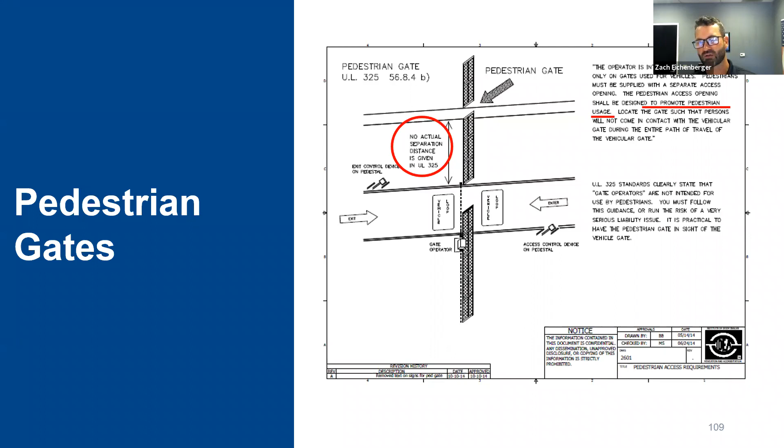Provide pedestrian access. It really should be in the vicinity of the gate, and you should promote that pedestrian access. If I've got a gate on the side of a house, will the front door of the house work? Yeah, that'll work, that's pedestrian access. But you might have a compound, right? Everything's fenced in. You've got to provide pedestrian access, and you got to promote that pedestrian access.

The standard doesn't go that far. Can I put this gate back in this stacking area? No, because that would put me in contact with the automatic gate when I use the pedestrian access.

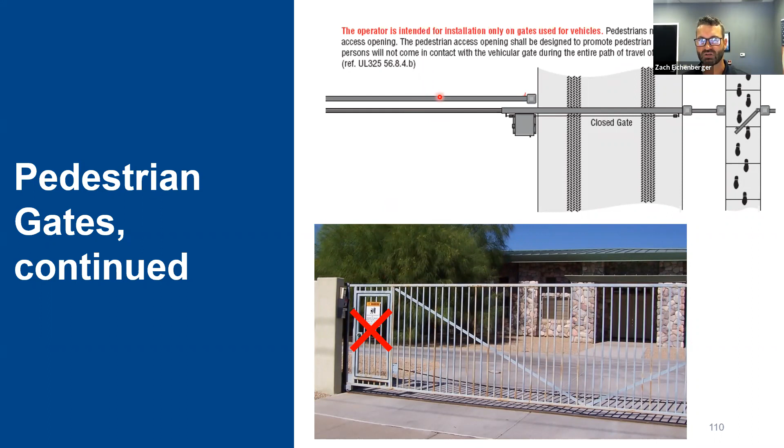What about all these other types of gates? Yep, they're all going to have their particular way of adding entrapment devices from a UL325 perspective. You've got the concept though, right? If that gate comes down, slides into, or swings into within 16 inches of some fixed counterposing edge, you'd probably be rest assured it's going to require an entrapment device. And in that manual, it will call out where it wants to see those entrapment devices and how many you need.

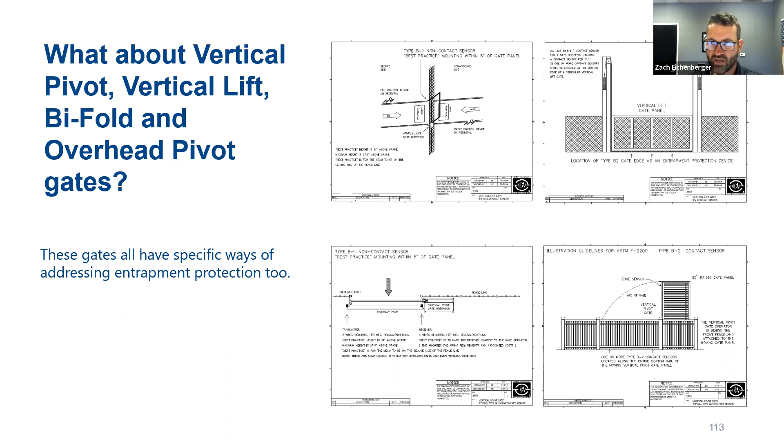Just unfortunately, we've only got a couple hours here, and I've only got a couple minutes. The rest of this is review. I'm going to keep going through this review here, but what I'm hoping you took away, if you've got to jump, is we can comply with these standards. It's not impossible. Is it more costly? Yes, it is. If it's designed properly, can I mitigate some of those costs? Yes, you can.

Read the manual, go by the manual, make sure you install per the standard. We'll provide some additional reference materials and clarity where it may be required. Don't forget to screen those gates, mitigate reach through, protect those draw-in posts. Don't put any access controls within 6 feet of any of your gates. Put those warning signs up. Develop a checklist and develop some best practices for your installers and designers so that they don't have to rethink this every time they go through the process.

Educate your customers. Believe it or not, as Tim mentioned earlier, more of these folks are interested in having a safe gate than you may realize. Is a property management company interested in limiting liabilities? Is an HOA interested in limiting their liabilities from an insurance perspective? Oh yeah, you better believe it. Is a business with a shipping yard or trucking yard or will-call area interested in limiting their liabilities? Oh yeah, you better believe it. We live in a litigious society, and even if it's just from a business perspective, they're going to want to limit those liabilities.

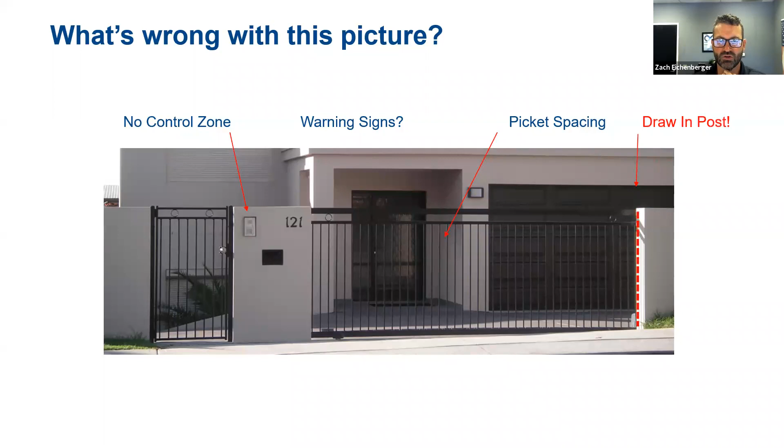I'm just going to take 5 more minutes to review a few of these slides. What's wrong with this picture? Potentially the no control zone. Where are the warning signs? Is that picket spacing 2 1/4? Have I protected the draw-in post? No, I haven't done that here. So those would be some call outs for this application.

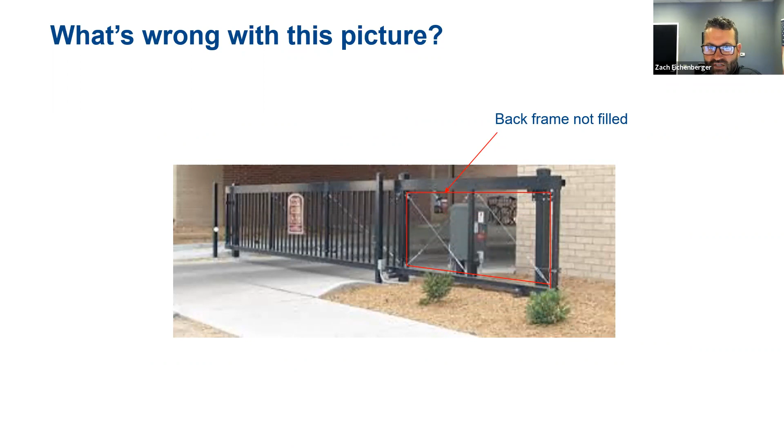How about this picture? Here's the major one. That tail end of that slide gate needs to be screened as well. It doesn't look like the main gate's screened properly either. Some other potential violations here. Warning signs would be one of them. So, just to call out, that back frame needs to be filled.

This guy, so we've got an ASTM violation on the bottom. We don't have those. We've got protrusions, right, greater than a 1/2 inch. Missing some warning signs here.

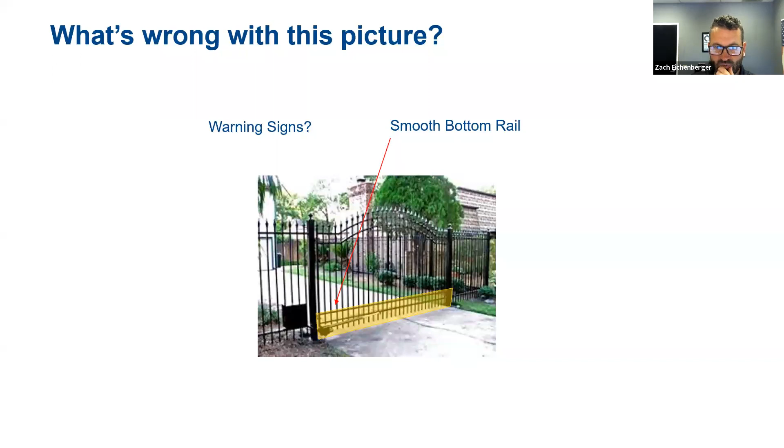This one also swings out towards the driveway, so we'd want to make sure we don't swing over a sidewalk or something like that.

Because we didn't want to lose a parking space or 2 or 10 does not give us the reason to make an unsafe job site. It just doesn't. It talked about at the very beginning of ASTM balancing safety with security. They didn't balance here, they didn't do a good job. Maybe swing gates weren't the right answer. Maybe they needed to locate these gates in or out more. Maybe they needed to do a vertical pivot. Maybe they could have slid a gate. I don't know. But the answer is, well, I didn't have any other choice.